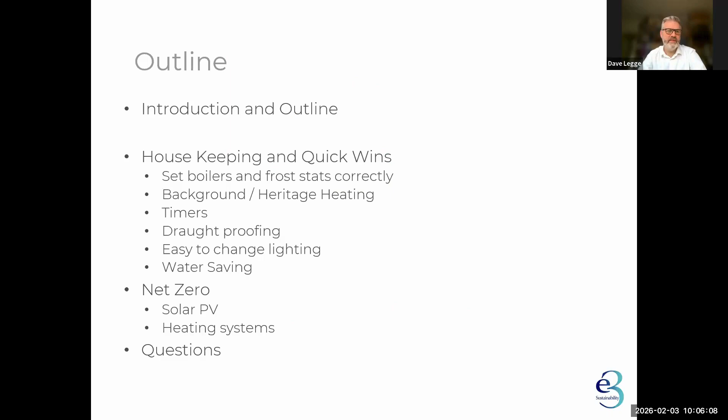And then we'll also touch upon some of the bigger projects, so solar PV, and various heating systems from a decarbonised point of view. There will be plenty of time to ask questions at the end because I know everyone will be having thoughts about what they want to do with their own building and organisation. So I will not spend too long going through all of the slides, and we'll just leave enough time for questions at the end. But this is the general order of the day.

Now, sometimes these can fall out of calibration, or they can be installed incorrectly. One site I went to a couple of years ago had this exact setup, but basically their time clock was out by a day and the time was out. So what they thought they were using overnight was actually costing them probably around about £500 a year more than they should have been.

Obviously, if you move to smart meters on your electric and on your gas, then we should be getting very accurate readings from that direct to the energy suppliers, and then they should be billing you accurately every month, which saves finding out you've been in arrears, or they're overcharging you and you've got a lot of your money to claim back. So a move to smart meters is always a good thing.

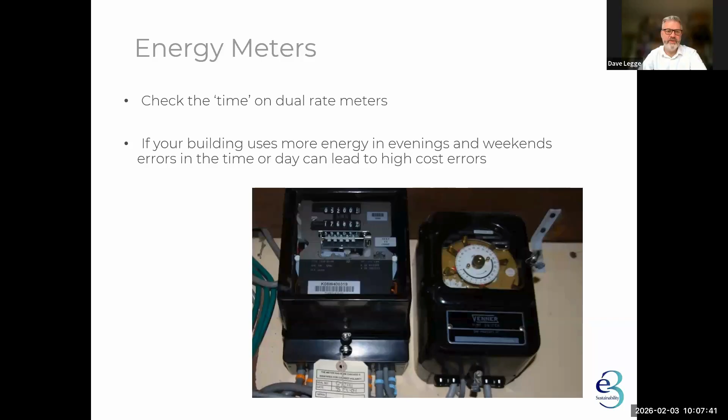People don't understand how they're meant to be set up correctly. They are designed to be two different dials, and the high flame should be the lower temperature than the low flame. But if somebody's got a boiler like that and they're slightly confused, I can talk to you offline about it because it's not as simple as going through it.

And ideally, we're looking for kind of something where we're not turning it up to max, we're not turning it up to the highest setting possible to try and, you know, raise the temperature of that room or space as quick as we possibly can, because that essentially doesn't work. You know, the physics doesn't work like that. So try and find the balance, and it might be around the kind of 4 or 5 mark that you find a good flow rate from the boiler to enable the radiators to get warm enough to heat the space comfortably.

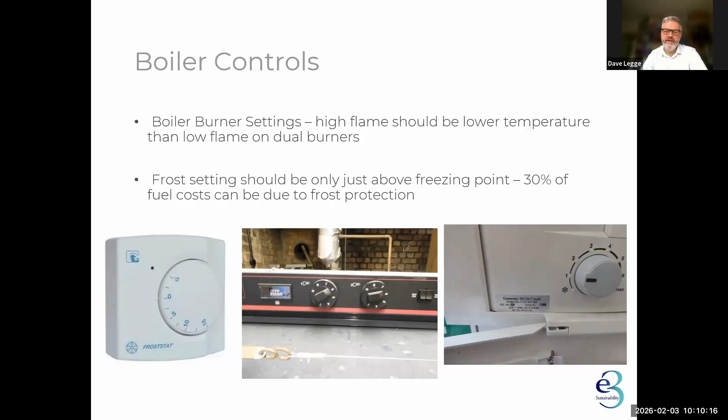A lot of the time, obviously, if they're set to a higher temperature, and a lot of halls are using basically background heating, so they're setting that to a, we keep the unoccupied temperature at 10 degrees, 12 degrees, 16 degrees maybe. So there's nobody in there. It could be middle of the night. It could be a day when that building's not in use and it's still set to 10, 12, 16 degrees. Now, obviously, the higher that set point, the more gas, LPG, oil you're consuming to keep that building warm for the sake of nothing, as far as I'm aware.

Obviously, if you've got a historic building and you need to stabilize that interior and you've been given specialist conservator advice around temperature and humidity having to be stable within that space, and you need to heat it to a certain temperature and you have humidity sensors in there, then that goes without saying you need to heat that building.

But I went to a building a few weeks ago, built in the 1980s, 90s, and they're heating it to 16 degrees continuously through winter, and raising that up to kind of 19 or 20 degrees when they're occupying it, because that was what has always been done. You know, that was what someone said 5 years ago, 10 years ago. So they're just heating it. I don't think there's any kind of real need to heat the buildings to a background temperature.

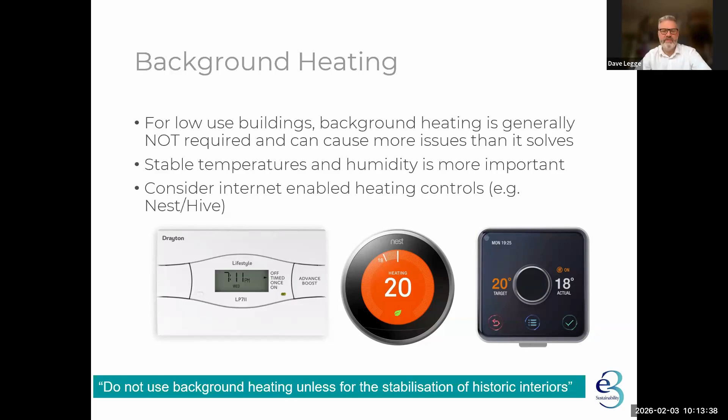Timers. Again, a lot of the time, there are other elements in the building which can be controlled with time clocks. External lighting is a classic. Really only needs to come on at dusk, ideally with a photocell sensor that monitors the outside lux levels and then says, right, I'll only turn on when the lux levels outside have dropped below X. And then you set them to turn off at a given time.

Kind of 11 o'clock is the typical, but it depends on what security measures you want for that site and what your neighbouring properties are. Are they residential? Are they next door to you? But really, kind of no later than 11 o'clock. And then you might have some kind of early morning lighting if you need that.

But essentially, most users are trying to use that for hand washing in toilets or kitchen sink washing up, or a bit of cleaning, something like that. So the programmable unit with a boost button works well. Some community organisations use just a boost button. So they come in and say, right, it's press once for half an hour, twice for an hour, 3 times for 2 hours, and then it goes off.

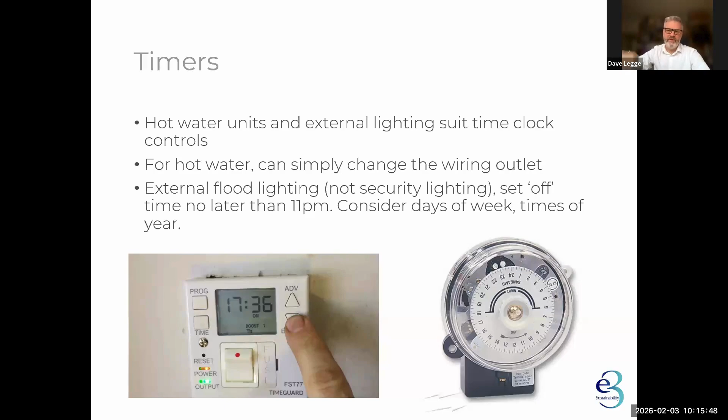But it saves it just being left on permanently the whole time, which is very useful in an intermittently used space, because it's just trying to maintain a steady 60 degrees temperature. So, albeit that they're insulated, it will cycle on and off, and you use energy.

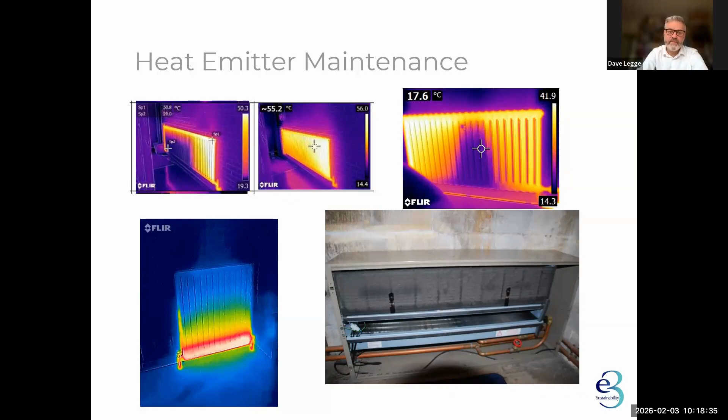And the last image is this fan convector with the front taken off, just to show you what's inside a fan convector. And they just need kind of annual cleaning, where you just need to be careful where you're cleaning those fins at the top of the heater. You can buy kind of fin combs, but a vacuum cleaner with a gentle brush attachment will take off most of that dust and increase the effectiveness of that fan convector, and that can just be done on a 6 monthly or annual basis as required.

Pipe lagging. So boiler rooms tend to be quite a warm space, but people don't tend to want to have meetings in boiler rooms. They're not the most attractive spaces in the world. You'll find a lot of the time the straight pipes are lagged, but the joints, the unions, the flanges, the valves are not lagged. And they are essentially, you know, a lot of the time big bore pipe work because they're coming off the boilers before they go into the smaller bore pipe work around the building. And they're essentially acting like a radiator in your boiler room.

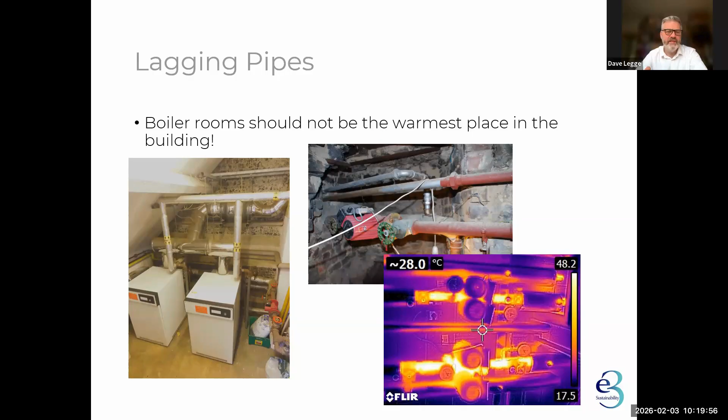So there are companies out there which will come and measure up the different kind of knobbly bits in your plant room and bespoke make foil backed Velcro jackets to fit around these different flanges, valves, joints, and stop the heat leaking into the boiler room and essentially push it into the space where you want it. They're a relatively good return on payback because they're fairly cheap to make and install. And obviously there's a lot of heat leaking out, especially when it's straight off the boiler. So that's coming out at 70, 75 degrees and losing it straight into the boiler room before it even gets to a radiator. So that's a good measure to consider.

Draught proofing. We've got windows and doors, which are the inevitable cause of drafts, and sometimes it's just convection of cold air across a cold surface. People always say, "Oh, if you sit next to the window, it's drafty." It's sometimes just the cold air is dropping down across the windows, and if you sit underneath the window, it feels cold. They might be well sealed, double glazed units, and you still find that convection. However, doors, particularly historic doors or doors which are worn over time, you need to try and reduce the amount of cold air ingress into the building.

We need to ensure that windows close well, that there aren't any blown double glazed seals. Obviously, if there is still single glazing and you're in an unlisted building, not in a conservation area, that we consider changing these to double glazed units. Thermally broken double glazed units, ideally with low E coating on them. And then with doors, a lot of doors have brush seals or fin seals on them. It's making sure that these are still working well. A lot of the time they're worn, you can see daylight through them. It's a case of replacing those.

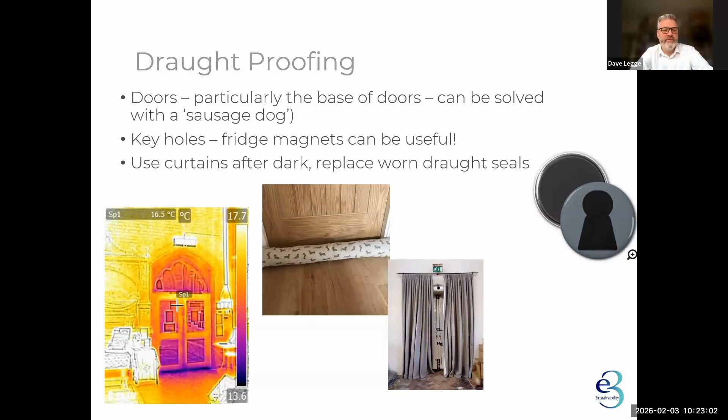Lighting, easy to change light bulbs. So a lot of spaces now are moving or have moved towards LED lighting, and that's the way everything's going. Most fittings really require a kind of change of the whole fitting. If you have a new whole fitting, they tend to come now with at least a 5-year warranty on that

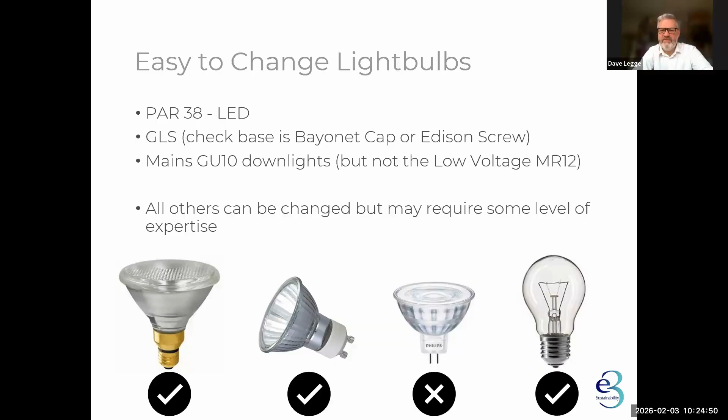It's important to check, obviously, the fittings, whether you've got a screw fitting, a small screw fitting, a bayonet cap, and what the diameter of that is before you rush out and just buy a load of new lamps, because there are B15s, B22s, SES 15s, ES 22s. So just check what the fitting is before you rush off to the electrical wholesalers to get those.

I'll touch on water saving as well. It's still relatively cheap, but it all helps. And actually, although we're sat in Somerset, probably thinking we're surrounded by water, the water saving helps. And if you're saving on not just cold water, but you're saving on your hot water, that's helping reduce your hot water provision, whether that's electric, gas, oil, etc.

A lot of these you can get free from the water companies, so Wessex Water. You can go online. You can look at who your local water provider is, and they can send out these kind of Save a Flush bags. They send out tap conversion kits, depending on what type of taps you've got. So the real old taps would need replacing with a new tap, but some of the newer taps you can take the head off the tap with this little conversion kit, which is shown in the picture, and you can install an aerated kind of bubbly airflow through it, which reduces the flow rate out of that tap.

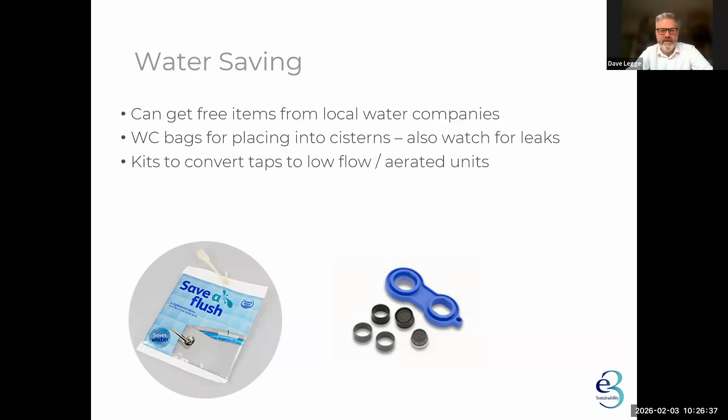If you're considering moving to kind of new taps, then depending on the users and the problems you have, maybe in the hall, you could go for the sensor taps you swing your hand in front of, or percussion taps you press and they turn off. But you want the flow to be fairly low coming out of those. In areas like kitchens or kind of big kitchen sinks or cleaners cupboards, it probably doesn't matter so much. And actually, probably what you do want is still a reasonable flow out of those, so you can fill a kitchen sink, a cleaner's mop bucket fairly quickly without them standing there for an hour waiting for bubbly water to come out at 3 litres a minute.

I'll move on to some of the kind of bigger things which I tend to get asked about quite regularly. So I've got solar PV as the first one, and the second one is heating. And then we can open up for questions.

So solar PV, essentially, generating electricity on site for your building. The balance on installing solar PV really, from a financial but also from an environmental point of view, hinges on how viable they are at that building, how consistently you use that building to consume the electricity that's being generated by the PV. So you've got to consider your daily, your weekly, and your annual load. Obviously, the annual load is that in summer the PVs will be generating a lot more than they will in winter, and vice versa.

You will be using a lot more energy in winter than you will be in summer. What we're aiming to try and get is probably around about 75% yield from your solar PV to make it financially and environmentally viable. The smart export guarantee at commercial rates or small business rates is less than what you get at the domestic level, and they vary depending on who that's with. But it then becomes financially unviable when you kind of drop below that to make it work.

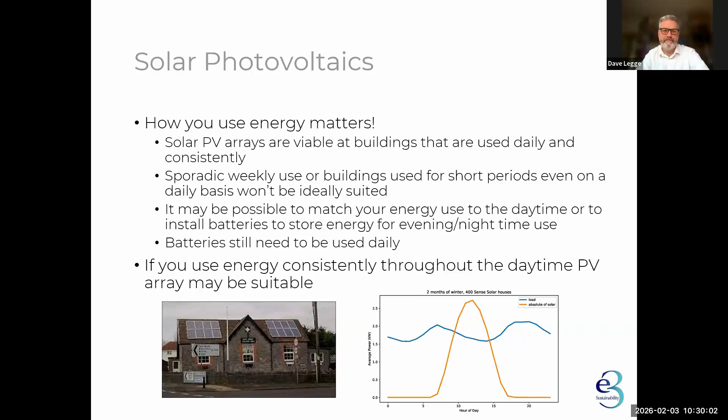Net zero carbon heating. I could probably speak for hours on this, but I won't. I'll try not to anyway.

So at the moment, most buildings I would say would have a gas-fired, LPG-fired, oil-fired boiler going to radiators or fan convectors in their building, and that's what most people are familiar with, and most people are used to. They tend to last 15 to 20 years, and it's really that kind of timeline which you want to look at and say, okay, if your boiler is pre-2012, say, at this point, we might really start looking at we need to replace this. And even if it's newer than that, you might turn around and say, well, we still want to be net zero carbon in the short term.

We want to look at replacing this earlier, or even we want to be able to agree as a committee or as an organisation that we are going to move towards X, and do your homework now before that boiler goes pop and you have a knee-jerk reaction of what are we going to do? Sudden panic. I know, we'll just get a hydrogen-ready new gas boiler and install that instead.

I can't kind of shy away from the fact that a gas boiler is probably the cheapest thing you could install. And it's going to be the thing that everyone's familiar with. So people won't like to move away from what they know and what they're used to. But it consumes fossil fuels. It's going to be in place for the next 20 years. And actually, is it the right thing to do?